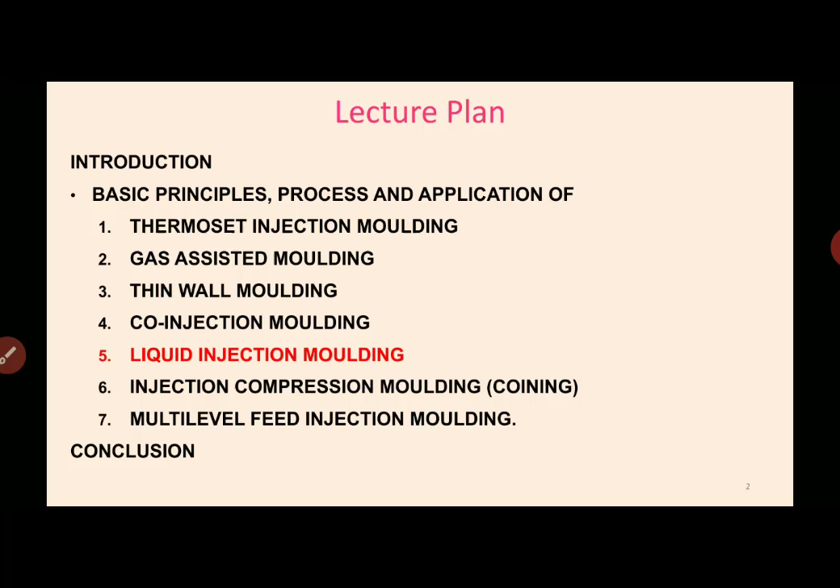Once again, welcome students. In this unit, we are discussing various advanced plastic processing techniques. In our early modules, we had discussed the basic principles, process and applications of thermoset injection molding, gas assisted injection molding, thin wall injection molding, and co-injection molding. Now in this module, we will be discussing the basic principle, process and applications of liquid injection molding.

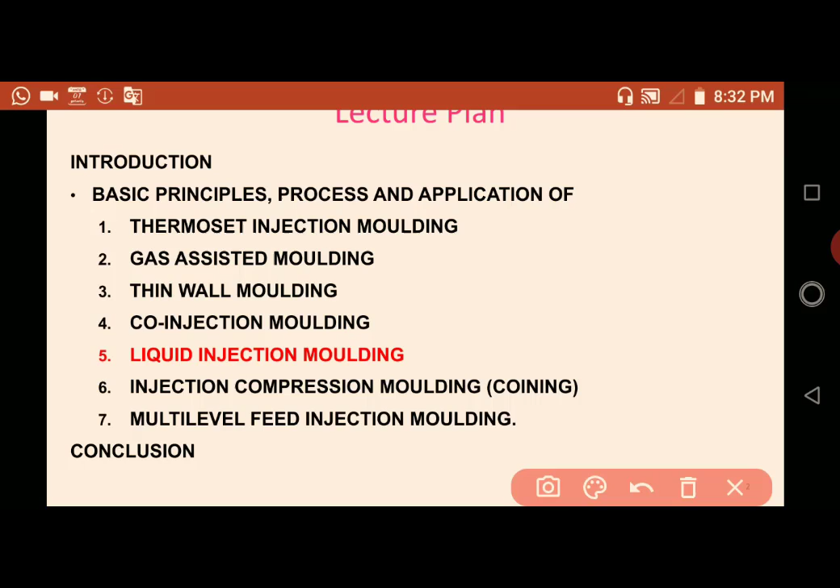So what is liquid injection molding? In liquid injection molding, normally silicone rubber is mainly used. So it is also called liquid silicone rubber injection molding. Liquid silicone rubber injection molding is a thermoset process that cools the material delivery system. That is, in the barrel, the material will be in cold condition and the mold will be in hot condition.

So the material from the barrel is injected. It's the same as the thermoplastic injection molding process, but here the barrel is in cold condition and the mold will be in hot condition. So the material is injected into the mold and it cures in the mold and the final product is obtained.

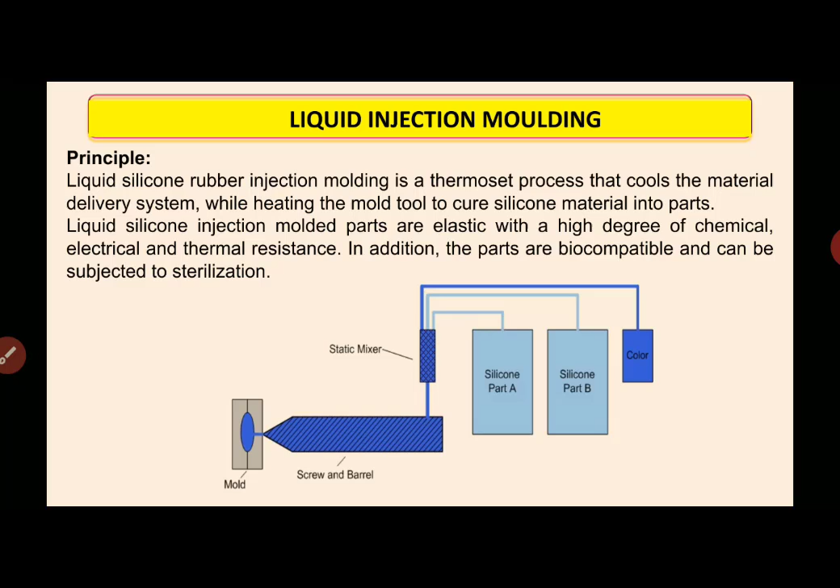So liquid silicone rubber injection molded parts are elastic with a high degree of chemical, electrical and thermal resistance. In addition, the liquid rubber injection molded parts are biocompatible. So in medical applications, they find a lot of applications, and they withstand very high temperature, so they can be subjected to sterilization also. Now we'll see the processing technique of liquid injection molding.

The liquid silicone rubber injection molding machine looks just like the thermoplastic injection molding machines. Both types of presses use the same basic machine parts, clamp unit and injection unit, in thermoplastic and also in liquid rubber injection. Every part will be the same. The silicone injection molding machine typically has a hydraulic ram and may have hydraulic toggle clamping. Some presses are designed with electric ram and electric toggle clamping also.

Unlike the high pressure used to mold thermoplastic parts, liquid injection molding pressure is in the range of only 800 psi. The purpose of the clamp is to contain the expansion force of the silicone material by keeping the mold closed as the rubber cures in the mold.

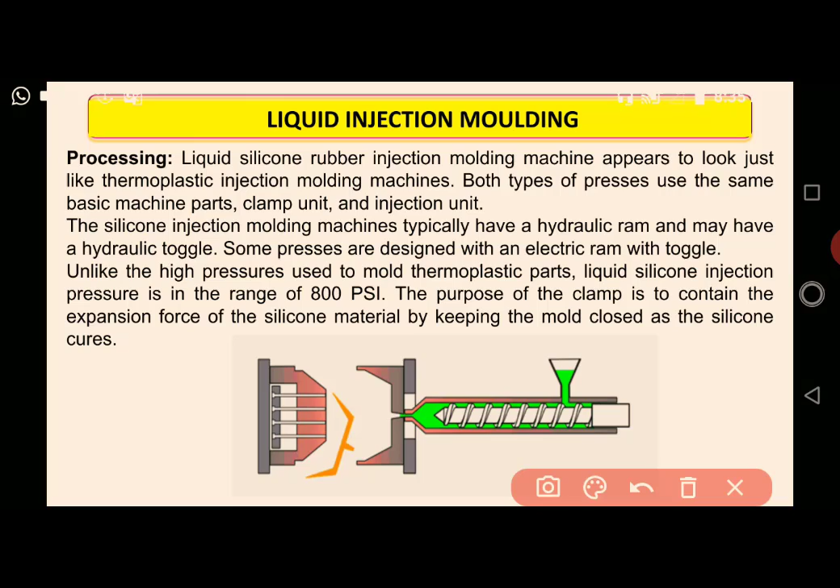The same as here, the material will be fed in the hopper, and through the screw the material gets plasticized and accumulates here. Once the required amount of material has accumulated in front of the screw, it is injected through this screw, and it gets filled in the mold where it gets cured. Since the mold is at higher temperature, it gets cured, and after curing the part is removed from the mold.

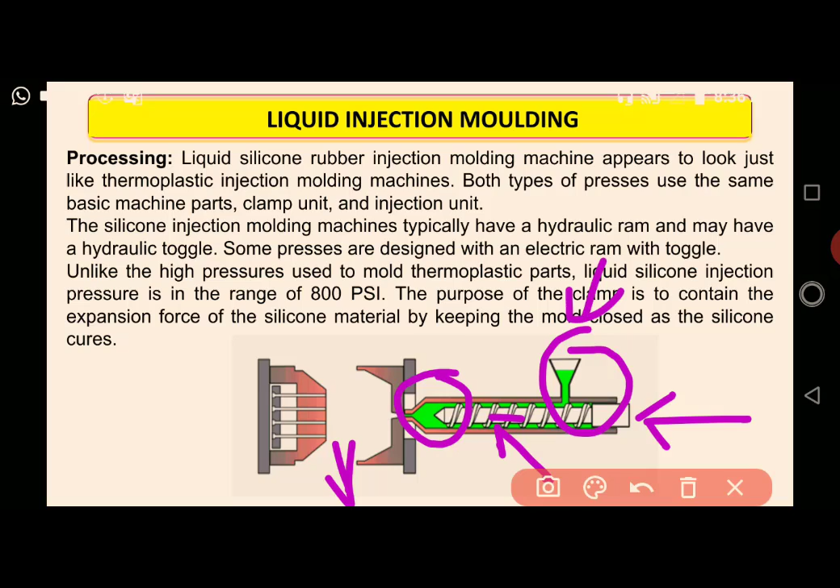The injection unit of liquid silicone runs cool with a water cooled barrel and nozzle to prevent curing of the liquid before going into the mold. The material should not be cured. So we have to cool the jacket. The jacket of the barrel should be cooled, maybe water cooled, so that only once it enters into the mold does it get cured.

Whereas a thermoplastic injection unit runs in the opposite way. That is, they need the barrel to be heated, depending on the type of plastic we are using, from 200 degrees centigrade or more. Then after processing, it is injected, and the product will be formed in the mold, where the mold is cooled for thermoplastic. But for liquid injection molding, the material should be heated in the mold.

And the liquid injection molding units also run at low pressure, less than 1000 psi, whereas in thermoplastic injection molding, tens of thousands of psi is required.

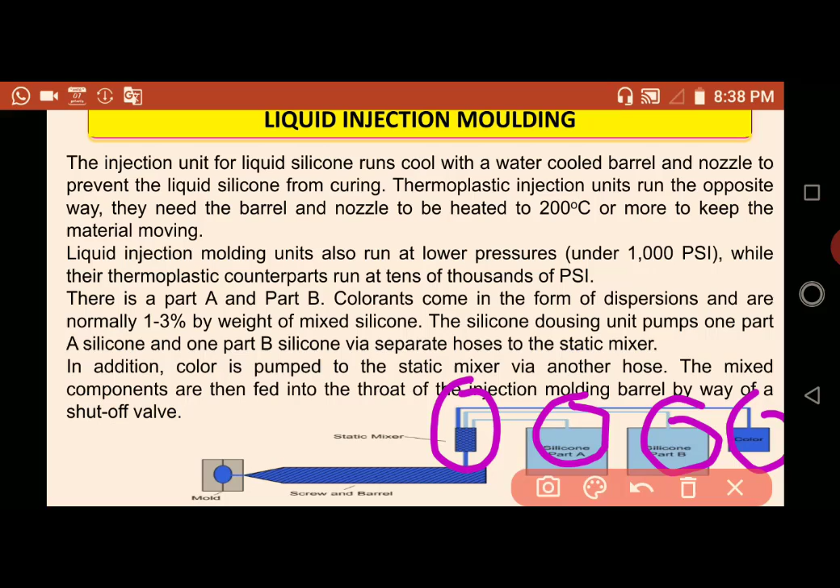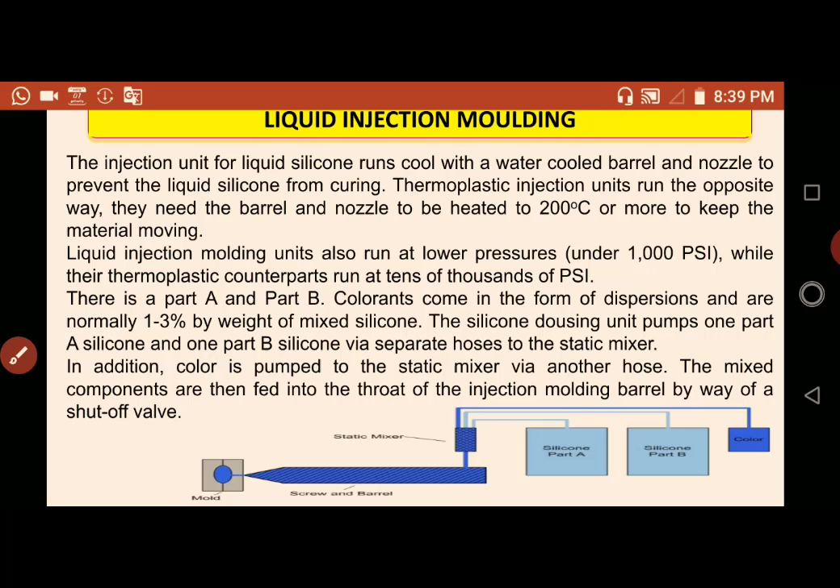So after mixing these three units, the mixed components are then fed into the throat of the injection molding barrel by way of a shut-off valve. The liquid injection molding machine includes different parts, that is injectors. This device pressurizes the liquid material, and metering units.

So in order for liquid injection molding to be successful, there needs to be a catalyst and the base-forming silicone material. Metering units help ensure that these two materials maintain a constant ratio while they are in the process of being released. And we have supply drums, and we have mixers.

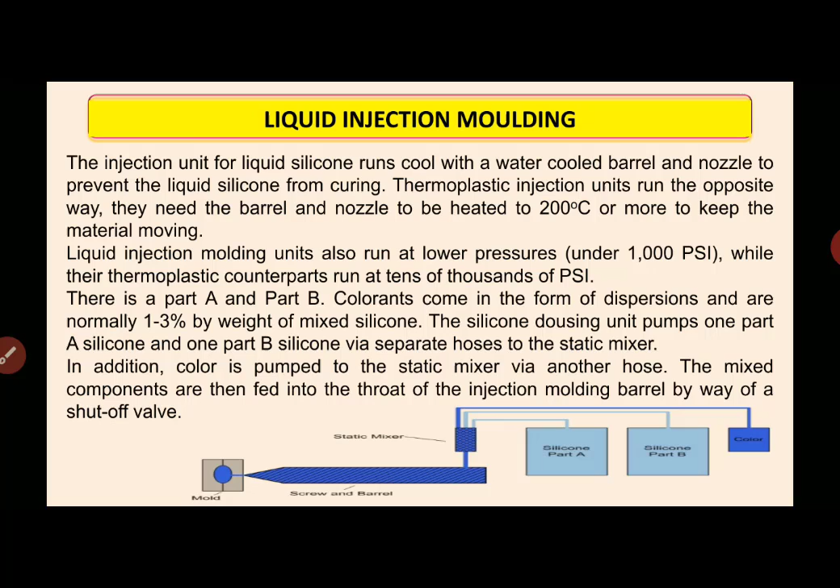The static mixer, as we saw in the earlier slide, this is the static mixer, and a nozzle; they carry out the injection into the mold. Then finally the mold and its clamp. This secures the mold during the production process, as well as when the mold opens and the process is completed, and we get the product.

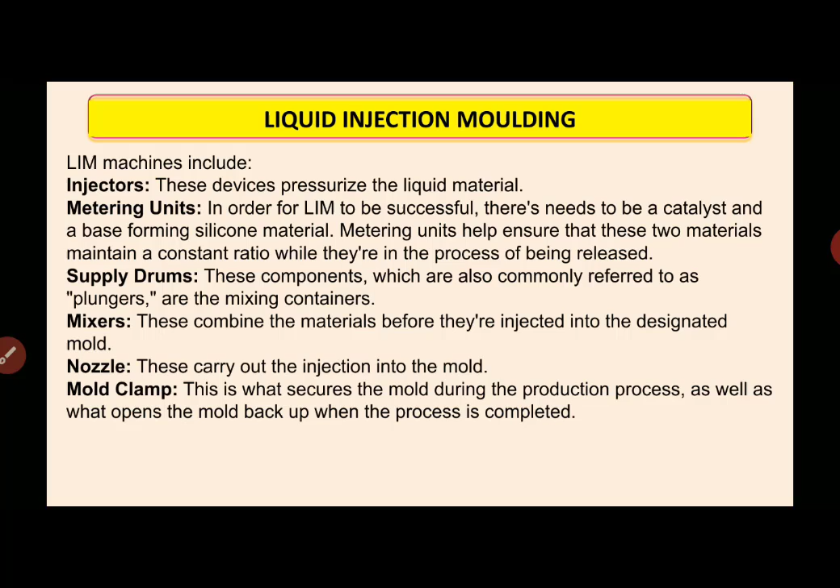Once the silicone material is inside the barrel, the shot of the cool mixed silicone rubber advances to the mold as the nozzle seals firmly against the mold. And the nozzle shut-off valve opens, and a measured shot of liquid silicone rubber is injected into the hot mold, usually 275 degrees Fahrenheit to 390 degrees Fahrenheit.

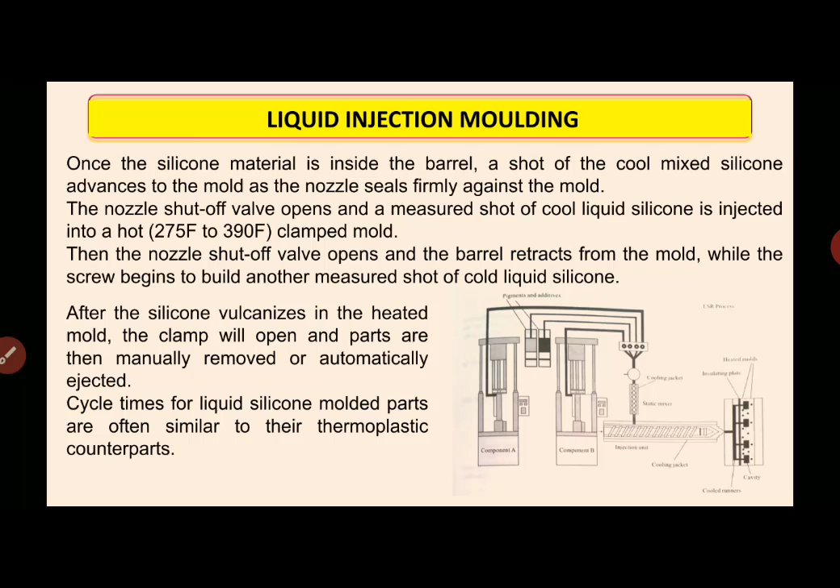Then the nozzle shut-off valve closes, and the barrel retracts from the mold, while the screw builds another measure for the next cycle, and the cold silicone rubber is accumulated. After the silicone vulcanizes in the heated mold, the clamp will open, and the parts are then manually removed or automatically ejected. And the cycle time for silicone rubber molded parts is often similar to that of its thermoplastic counterparts.

Now we shall see the advantages of liquid silicone rubber injection molding. Liquid silicone rubber based products have constant mechanical properties over a wide temperature range, and the labor-intensive preparation of rubber based product is eliminated. Since here it is automatically mixed, we need not prepare the rubber like in the conventional rubber manufacturing process. In liquid silicone rubber manufacturing, manual labor is reduced, and we have shorter cycle time and lower injection pressure also.

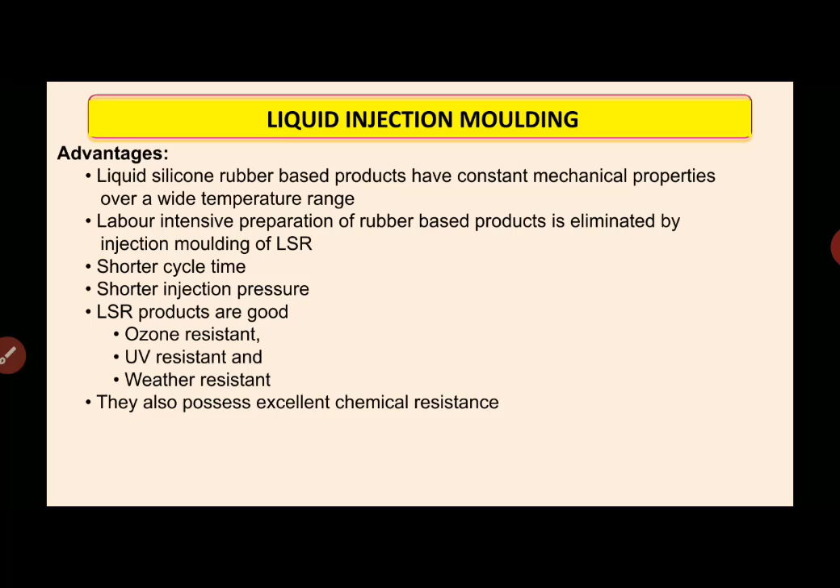These liquid silicone rubber products have excellent ozone resistance, UV resistance, weather resistance, and also excellent chemical resistance. So owing to these advantages, they find a lot of applications. Typical applications include seals of all kinds, O-rings, isolators, electronic components, parts in aerospace and automotive industries, many electrical devices, and numerous medical parts manufactured using liquid silicone rubber injection molding techniques.

So we have seen in this module the basic principle behind liquid injection molding, its processing characteristics, merits and demerits, and finally the applications of liquid silicone rubber injection molding. In our next module, we will be discussing one more interesting advanced plastic processing technique. Thank you.